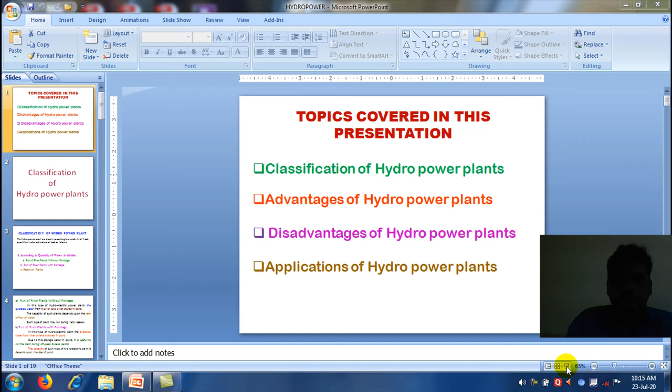Last video lecture we discussed about the hydropower station and the site selection. Now in this video we are going to discuss about the classifications.

The topics covered in this presentation are classification of hydropower plants, what is the basis, how to classify the hydropower plants based on some categories, advantages, disadvantages of hydropower plant, as well as the applications, important applications of hydropower plants.

First, we are going to discuss about the classification, how the hydropower plant has been classified. What is the hydro classification means? Hydropower plants are classified according to availability of head, quantity of water, and nature of load.

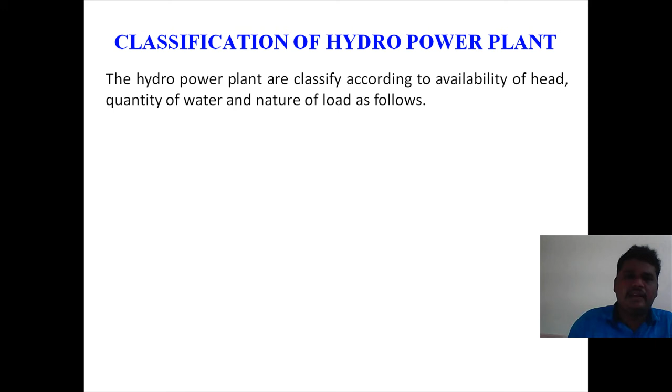Based on this only, it has been classified based on available head and the available quantity of water, and the nature of load, what type of load it is.

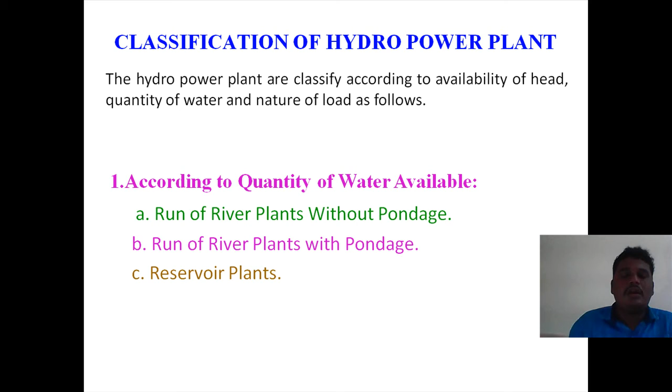Run of river plants without pondage. In this type of hydroelectric power plant, the available water from the river or lake is not stored in a pond. There is no storage facility. Whenever the storage facility is not there, they can use the water only within a season, and the water should not be used in non-rainy seasons.

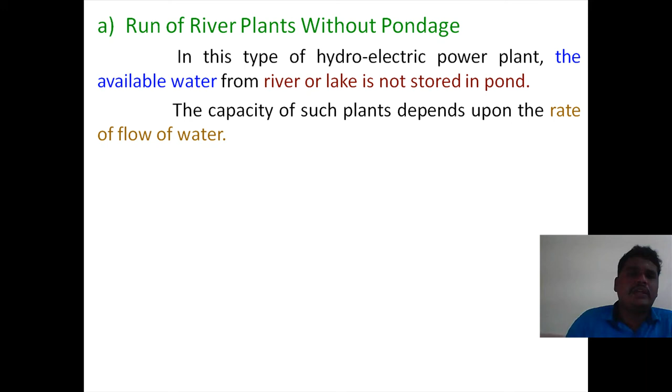The capacity of such plants depends upon the rate of flow. Whenever there is a sufficient rate of flow, it can generate power; otherwise they can't give any. Such plants run during the rainy season only. During the non-rainy season, only the discharge water can help run the power plant, but in case of rainy season, it should be used for the output power as base load.

Next, run of river with pondage. With pondage means it is opposite to that without pondage. In this type of hydroelectric power plant, the available water from the river or lake is stored in a pond.

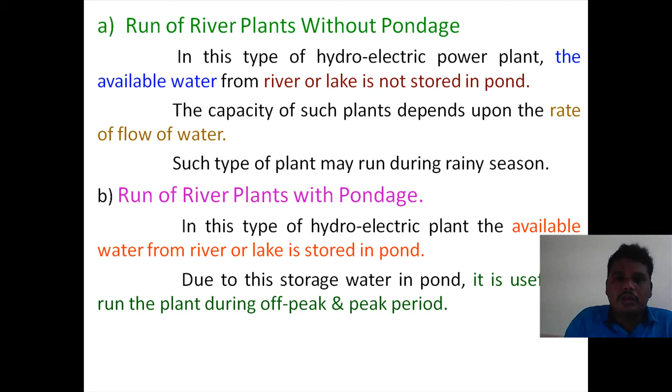Whenever there is storage, that stored water can be used even when there is no rainfall, during the entire year. Due to the storage of water in the pond, it is useful to run the plant during peak as well as non-peak periods. Whenever there is no rainfall, we can use the stored water; when there is rainfall, we can use the discharge directly.

The capacity of such a hydroelectric power plant depends upon the size of the pond. When the size of the pond is large, it produces more electricity. When the size of the pond is very small, during an off-peak period, it produces less electricity.

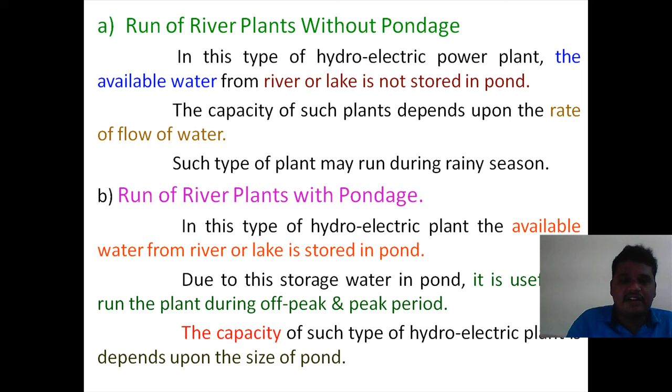Reservoir plants. Generally our plants are reservoir plants. The reservoir stores water as potential energy. In this type of hydroelectric power plant, a reservoir is provided, which is useful to store an ample quantity, meaning a huge quantity of water during the rainy season.

When the rainy season is there, there is storage of water, plenty of water available. This is useful throughout the year. Whenever there are no rains, during the summer season also, they can use the water throughout the year. Whenever there is rainfall, they can store the water.

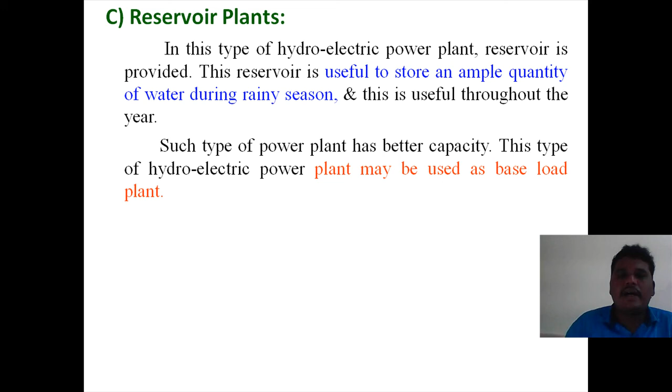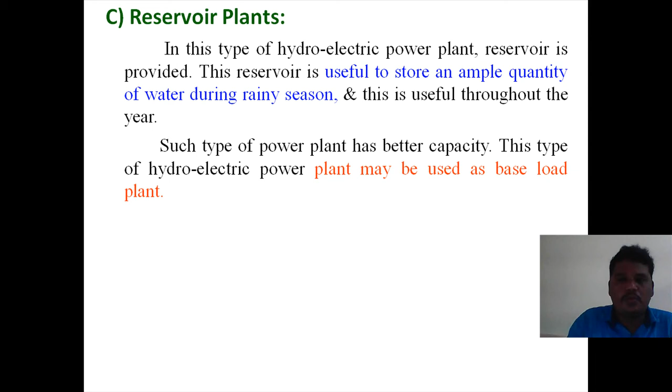Such type of hydropower plant has better capacity. Reservoir plants have better capacity. This type of hydroelectric power plant may be used as base load plants also.

Look at here, a reservoir is there, nothing but a river. We can store the water here in the reservoir. Now I construct a sluice gate. Whenever there is a full volume of water, we can raise it. The dam gets damaged, the dam gets collapsed sometimes.

That's why during the rainy season itself, whenever the gates are raised, that flow is directed close to the penstock and strikes the turbine. Whenever the turbine is struck, the generator runs, and whenever the generator runs, it produces electricity.

Now hydraulic power, by striking of turbine, is converted into mechanical power. This useful mechanical power is then used to generate electricity by using generators. Now the powerhouse is where the electrical quantities are available.

And there is a draft tube. A draft tube is generally maintained in a reaction turbine, that's why you are placing a Francis turbine. Our Nagarjuna Sagar dam also consists of a Francis turbine. It's a medium head plant, that's why Francis turbine is used since it is a reaction turbine. There may be a need to increase the pressure, that's why you are providing a draft tube here.

Now, whenever the water comes out from the draft tube, the water has moved to the tail race. Now there is a head race, and there will be the tail race. The water has reached the tail race, that's why reservoir plants store the potential energy during a peak period, otherwise a peak off period.

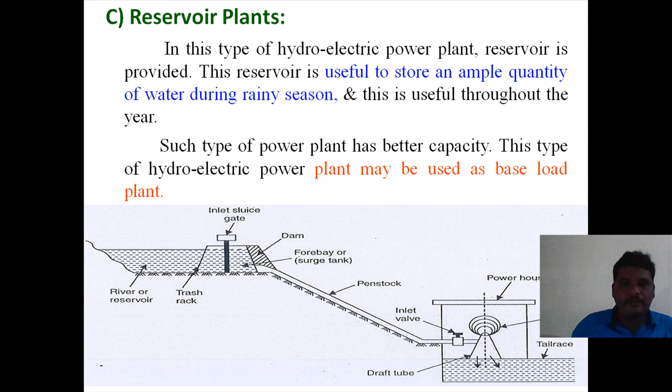Next, according to the head availability, low head plants are below 30 meters, medium head plants are 30 to 300 meters, and high head plants are above 300 meters. Based on the head of the plant, we have to use the turbines accordingly.

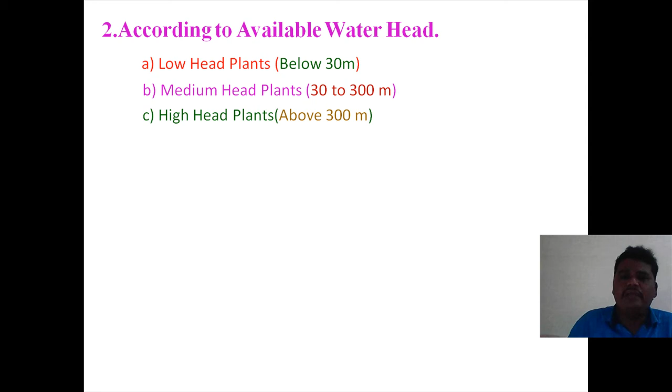For low head, we have to use axial turbines. For medium head, we have to use reaction turbines. For high head, we have to use impulse turbines. Next, what is a low head turbine?

A low head power plant stores water by construction of a dam across the river, otherwise a lake. The powerhouse is installed near the base of the dam on the downstream side. It is constructed using concrete materials.

Next, barrages with regulating gates are provided to flow the excess water in the river. The barrages are constructed over low head plants. Whenever the barrages have been constructed, gates are provided for the excess water in a river or lake.

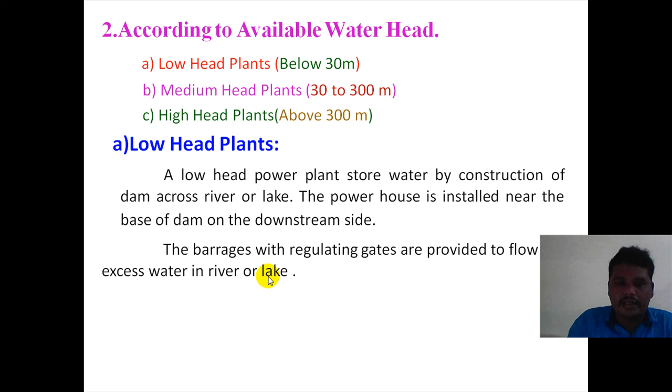Now in a low head power plant there is a head race. The dam is constructed over the head race. Now there is a penstock. Whenever opened, the water goes into the penstock and strikes the powerhouse. There is also a tail race.

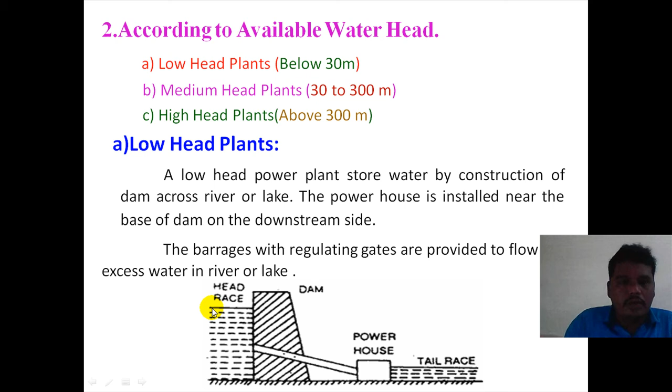Now the powerhouse is located near the dam, very near to it. This is low head power plant, the head is very low, that's why it is called a low head power plant.

Next, medium head plants. If the available water head is between 30 to 300 meters, the plant is said to be a medium head plant.

Water is led to the turbine from the forebay by the penstock. There may be excess water when there is a medium head compared to low head, and that excess water is stored in the forebay. That forebay water is passed through the penstocks, which may be made of steel, otherwise concrete materials.

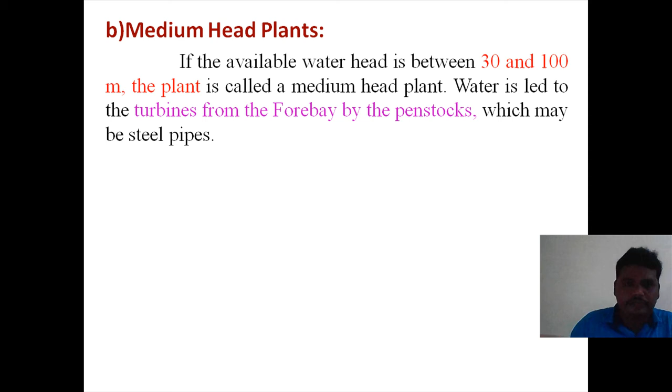The forebay also stores the rejected water, and when the load on the turbine increases, the forebay is used to send the water.

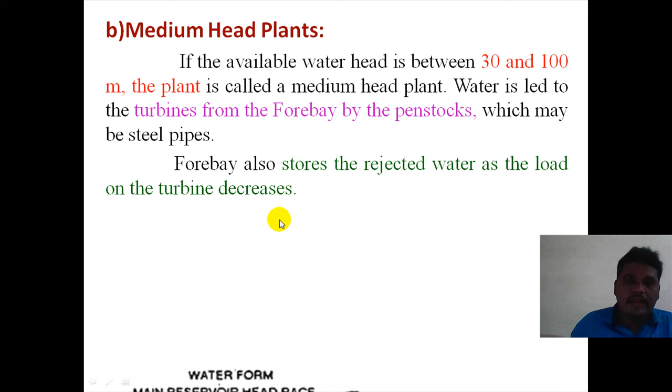Now there is a main reservoir, which may be at a high head or medium head. Whenever the forebay has stored water here, the remaining water goes to the tail race, and through the forebay, the water is passed to the powerhouse, which strikes the turbine. The turbine generates electricity and the water passes through the tail race.

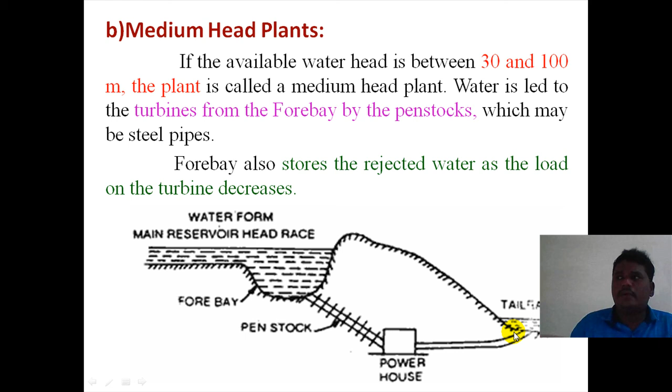Now when the load increases, the forebay sends the water which strikes the turbine and rotates it, and the water goes to the tail race. This is a mountain region, and generally these plants are constructed over hilly mountains.

If available head is more than 300 meters, the plant is said to be a high head plant. In civil works, whenever there is a high head or medium head, we have to use a forebay.

In a high head plant, we have to use a surge tank. What is its use? Its function is to meet the sudden change in requirement of water caused by fluctuations in the load system. There may be a flow of water pressure, and in order to relieve the water pressures in a penstock, we have to use a surge tank.

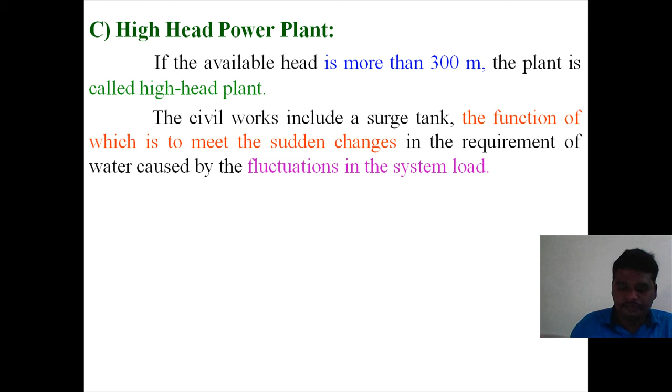Now in a high head power plant, a reservoir is there, a dam has been constructed. A tunnel is nothing but a passage of water across the mountains. Such a source tank is nothing but the surge tank.

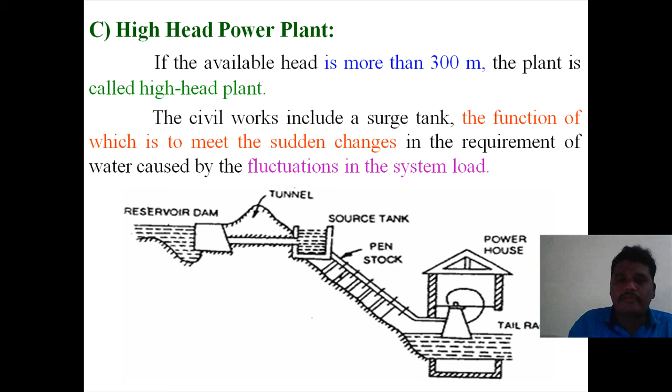By the tunnel, water passes through the penstock. The penstock is subjected to high pressure. In order to relieve these high pressures, we use a surge tank, which is mounted across the penstock and can be placed anywhere. It relieves the pressures inside the penstock, then the water strikes the turbine to produce output power.

Next, according to the nature of load, there are base load plants, peak load plants, and pumped storage hydroelectric plants. Based on the availability of load, the type of load may be peak load, base load, or pumped storage.

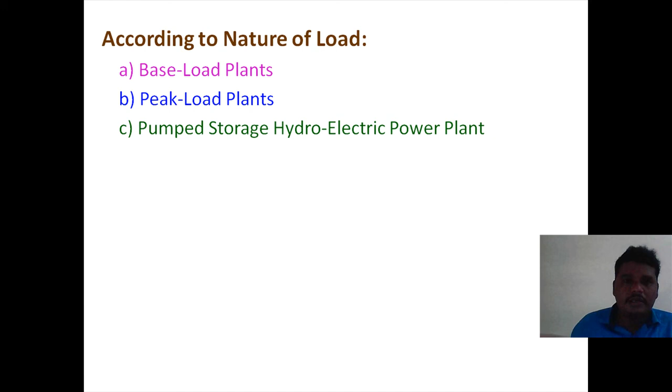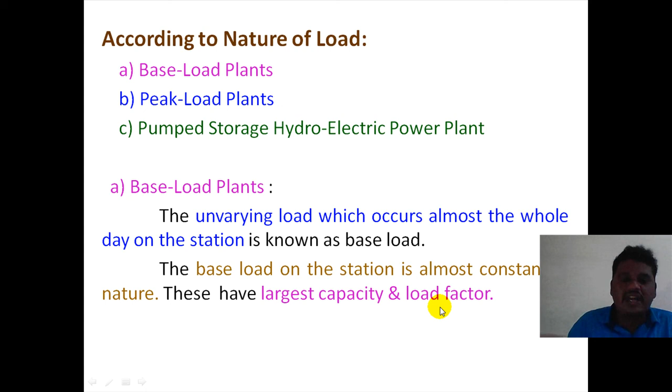Base load plants have an unvarying, continuous load which occurs almost the whole day at a station. The constant load that occurs throughout the whole day of a station is called base load. The base load on a station is almost constant in nature, meaning uniform continuous load. Base load plants have the largest capacity as well as the highest load factor for producing electricity.

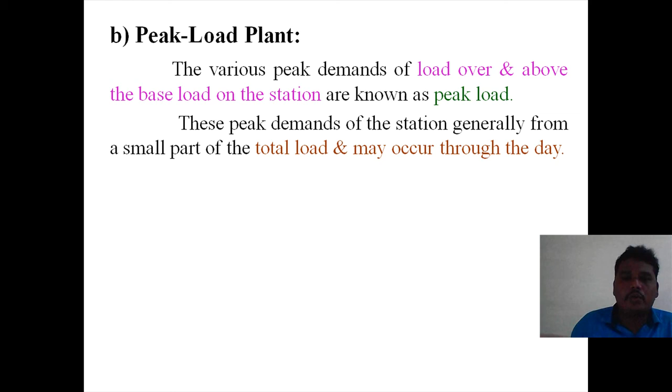Next, peak load. The various peak demands of load over and above the base load on a station is known as peak load. There may be continuous power, and whenever there is an increase during the rainy season, that increase in power is the peak load power. These peak demands on a station are generally a small part of the total load and may occur throughout the day.

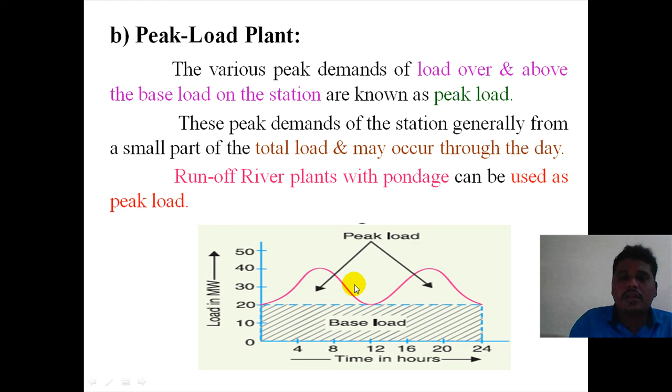Peak load includes run-off river plants with or without pondage. With pondage means continuous power is given during the off-season also. Plotting load against time in hours, the base load gives a constant power throughout the day, and whenever there is an increase above the base load, that is called peak load power.

Next, the pumped storage hydroelectric power plant. This type of power plant is used where less amount of water is available. We have to use pumped storage tanks. The storage from the head race pond is useful for generation of electricity. Whenever water has passed away to the tail race, that water is again used by using a pumped storage plant, pumped back by using motors.

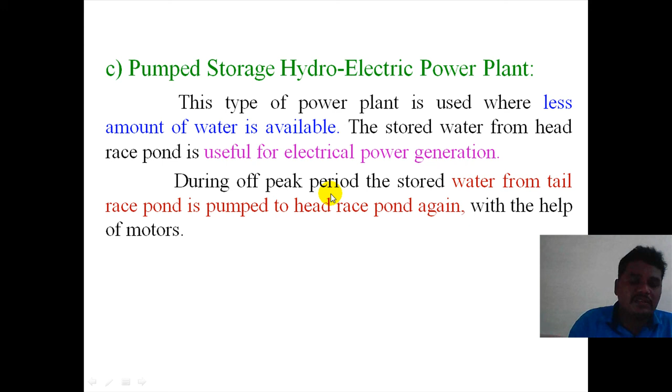During the off-peak period, that means during a very hot summer season, the storage water from the tail race pond in the down region is pumped back to the head race pond with the help of motors. This cycle is continuously repeated, that's why it's called pumped storage, because the water is again pumped back to the head race.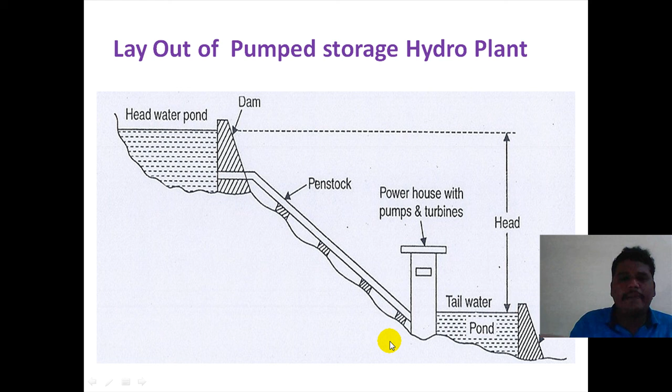This cycle goes on repeated. That's why it's called pumped storage. This is a very important one: pumped storage.

Next, we come to the advantages of hydroelectric power stations.

First, the operating cost of a hydroelectric power plant is less when compared to thermal and other power plants. Less skilled persons are necessary for operation. Operating cost is also very less compared to thermal plants because there's no need for boilers or similar equipment. That's why operating cost is less.

Next, in case of hydroelectric power plants, no fuel is necessary. Why? Because there is no fuel, there is no smoke, and no pollution. No pollution hazards - water pollution is not there, and air pollution is not there.

Next, hydroelectric power plant efficiency is higher than other power plants. It gives higher efficiency compared to other power plants, and efficiency doesn't change with the age of the plant - whenever there is an increase in age, there is no change in efficiency.

Hydroelectric power plants give a quick response to changes in load compared to other power plants - the response time is very fast compared to thermal power plants. Hydroelectric power plants are also pollution proof - pollutions are very less.

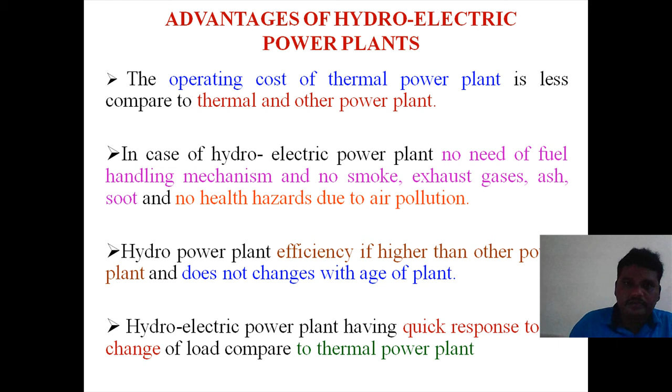Now, disadvantages. What are the disadvantages? Main site selection is a disadvantage, as well as...

The investment of a hydroelectric power plant is much more than a thermal power plant. The investment is high because you have to build dams - the dam should be large, and power plant construction also takes a lot of time. That's why investment is more.

Power generation by hydroelectric power plants depends upon water availability only. Without water, they can't generate electric power - this depends upon the natural phenomenon of rainfall. If there is no rainfall in the year, no hydroelectric power is produced. That is one of the disadvantages.

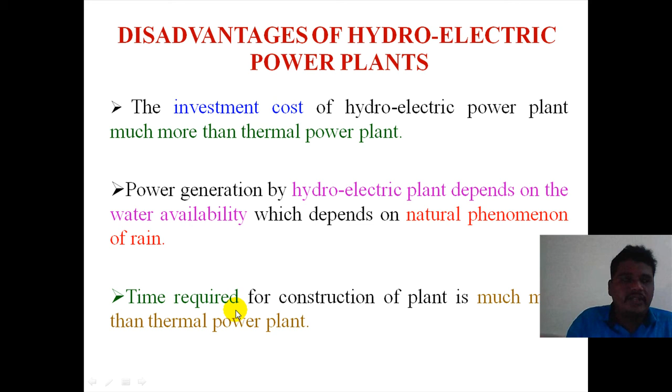Time required for construction of the plant is much more than for a thermal power plant. The time also requires more because we have to construct the dam - dam construction takes years of time, and we have to site the mountains, forebays, tunnels, and similar structures.

Time is also more. Next, we come to applications of hydroelectric power stations. We are discussing the major applications only.

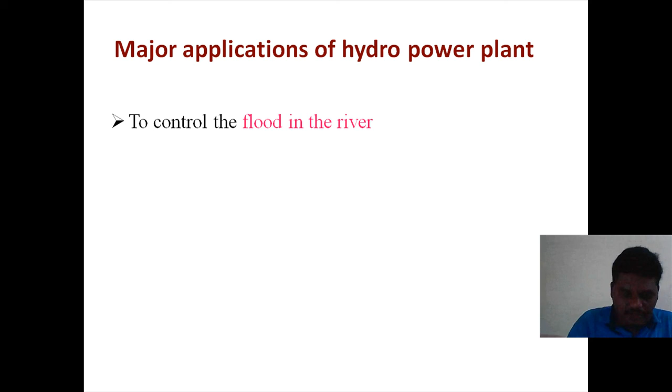To control floods in the rivers - we can stop the floods.

Next, water for irrigation, for agriculture, as well as for fisheries. We have to use the water for fishery purposes, for agriculture purposes, for animal husbandry purposes, and for irrigation use.

Small hydro power plants, up to 10 megawatts, are used for supplying industrial plants - this water is also used for industrial power plants.

Next, micro hydro power plants, which are smaller than small hydro plants, give power for isolated homes - individual homes that are there. They provide water for usage during the summer season, since the water is very less. That's why they provide power for isolated homes as well as small community kilowatt needs.

To store and supply drinking water - it stores the water and also supplies drinking water to homes and industries.

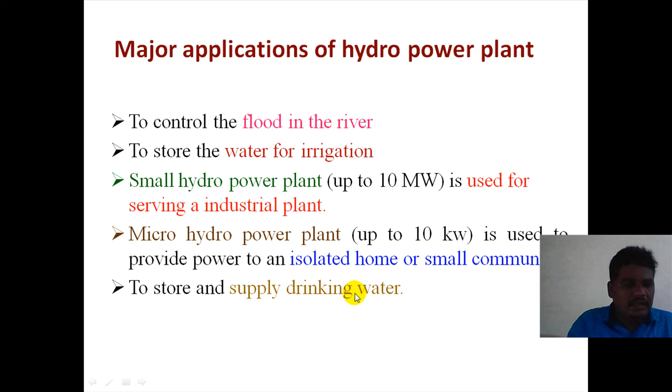This covers the classification, advantages and disadvantages of hydroelectric power stations. Okay, this is about hydroelectric power station classifications, advantages and disadvantages.